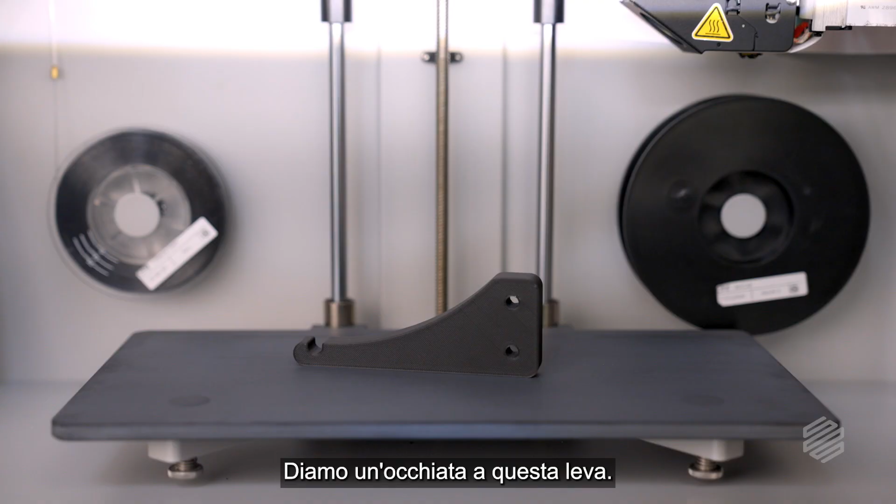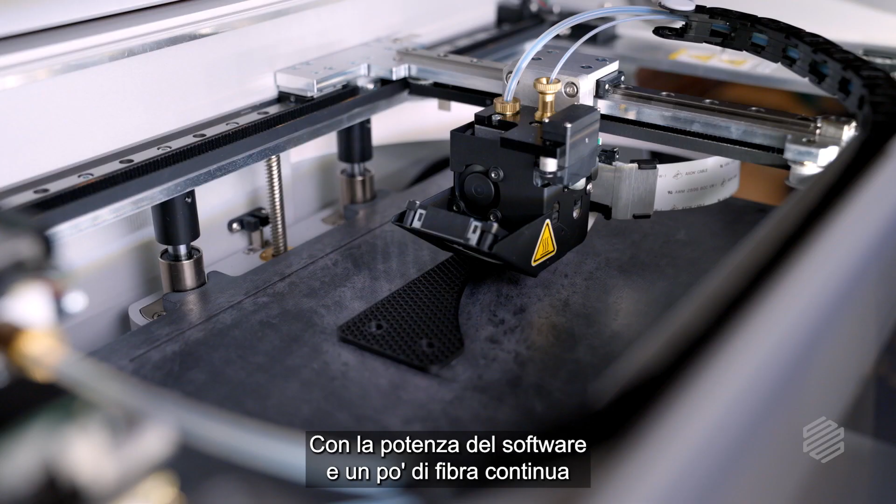Take a look at this lever. It's an Onyx part, printed solid because you need it to be really strong. What if I told you you could cut print time in half, double the stiffness, and still maintain strength and cost? With the power of software and a little bit of continuous fiber, that's all possible. Let's dive in and I'll show you how.

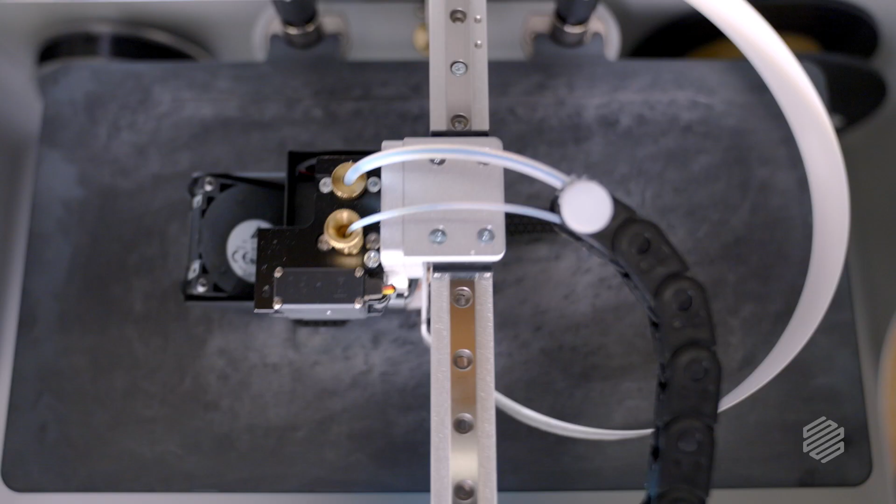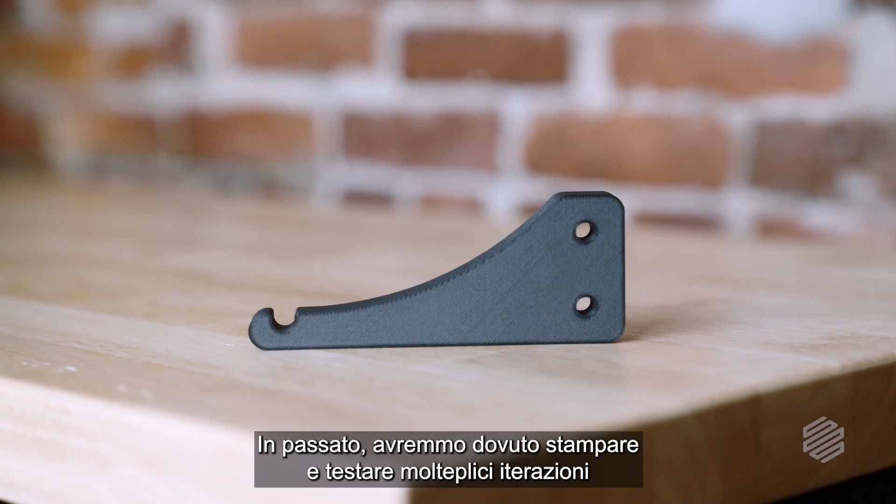As engineers, we are always making trade-offs between quality, time, and cost. With 3D printed parts in particular, finding the right balance of settings to meet functional requirements can be difficult. We need the new part to be strong, quick to print, and cost-effective. And in the past, we'd have to print and test multiple iterations to dial in the settings. It took a lot of time and a lot of materials just to get to a design that worked.

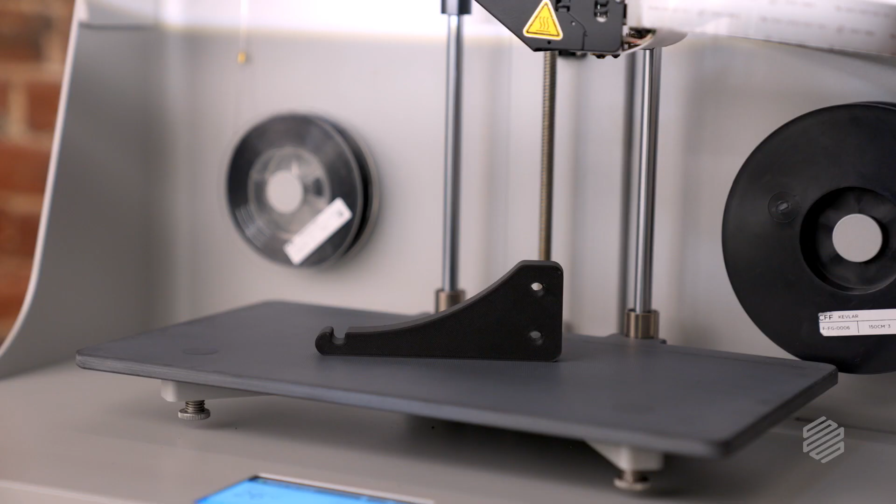Not anymore. Simulation from Markforged allows you to test your part virtually to see if it will be strong enough. You can then optimize the print parameters, including the placement of continuous carbon fiber reinforcement, all before you hit print for the first time. So let's use this lever as an example.

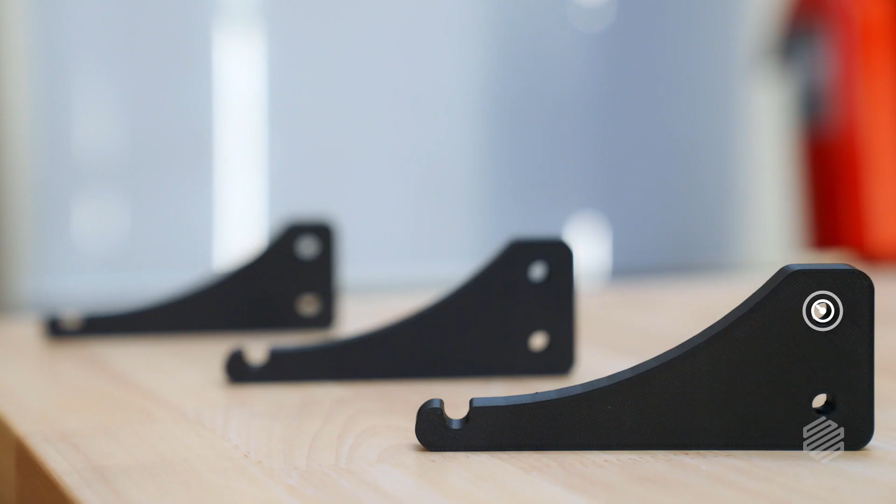You need it to hold a 100 Newton load with a factor of safety of at least 2. And it can't deflect more than 1 millimeter and needs to be as light as possible. How would you achieve that? Let's look at 3 different variants of the lever. The first was printed with default slicer settings. The second with a solid infill. The third part is optimized using simulation.

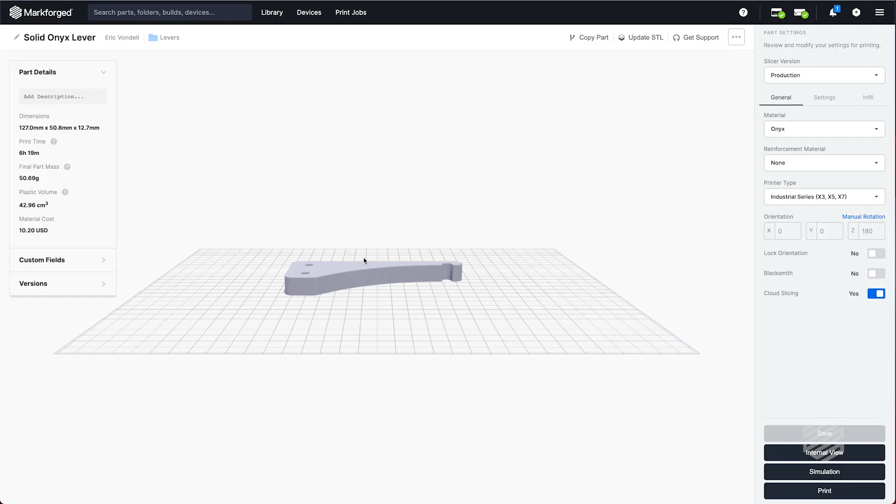We can see in Eiger that the first part took 3 hours and 32 minutes to print. It's not strong or stiff enough for us to use. The second print with solid infill took 6 hours and 19 minutes to print. It meets the factor of safety of 2, but has a maximum deflection of 1.8 millimeters. The third print, optimized using simulation, took 3 hours and 41 minutes to print. It meets the factor of safety of 2, cutting print time almost in half with the same required strength.

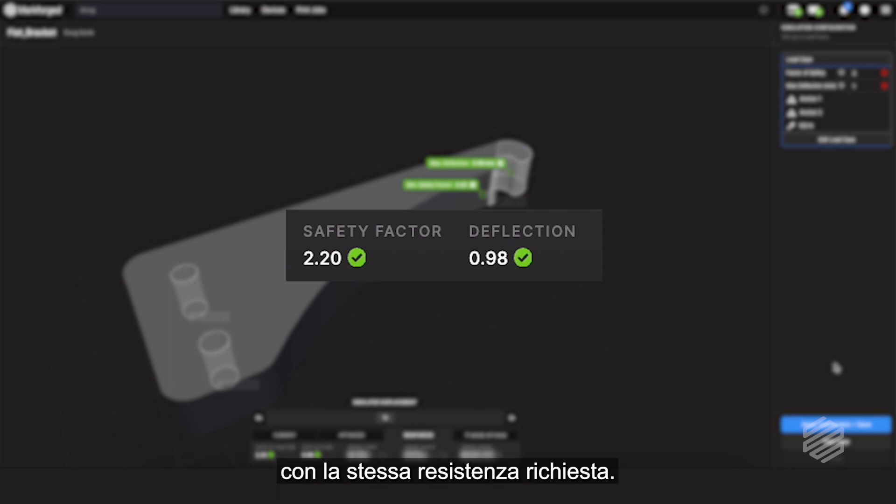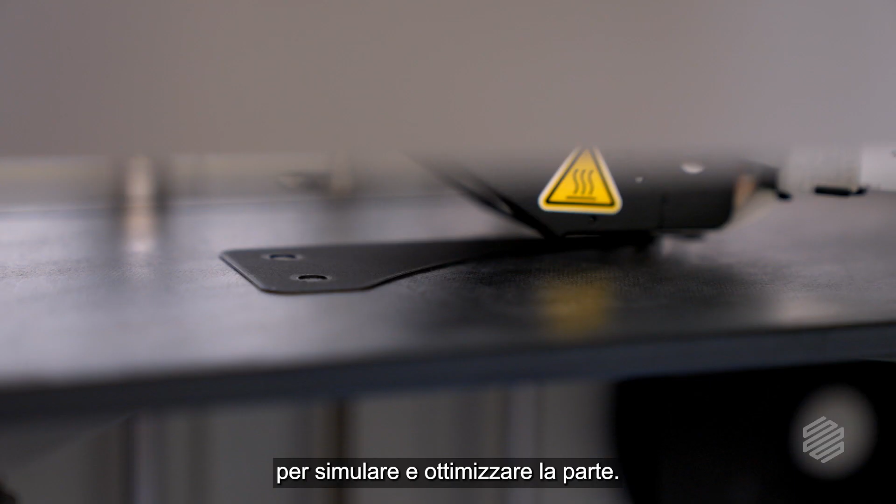With simulation, it took only a few minutes to simulate and optimize this part. Meanwhile, it takes 14 hours of printing just to arrive at the same conclusion. No more guessing how much or where to place fiber, or spending countless hours on print-break cycles. Print the right part the first time.